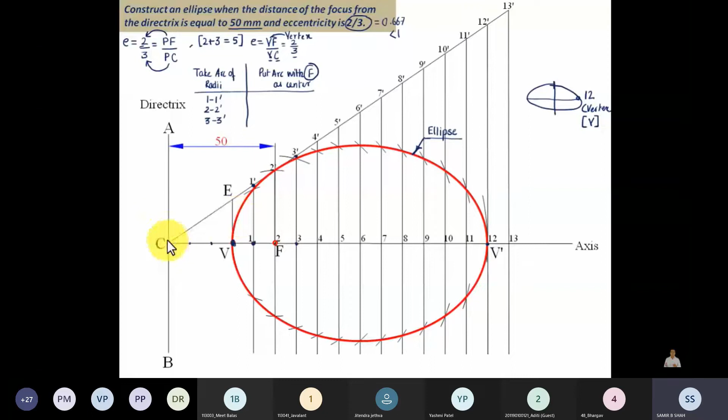So what you can essentially do is keep one leg of your compass at C, other leg at V. Then with V-dash as the center, you need to cut an arc, a vertical line through this. That's the directrix, A-dash B-dash. Over here it was AB, here it's going to be A-dash B-dash.

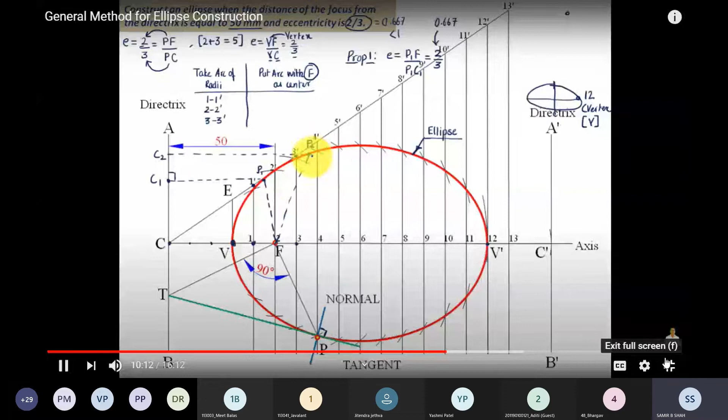Let's say we have another point, P2. When you join P2 with the focus F, and draw a perpendicular line from P2 to the directrix, let's call that point C2, then again if you calculate the distance from P2 to F and from P2 to C2, the ratio of these two distances is again equal to 0.667, that is P2F over P2C2. So that's a very important property of an ellipse.

The point moves somewhere along this plane in such a manner that it maintains its ratio, which is always equal to 2 by 3. That's a very important property. And the second property, let me explain what that is.

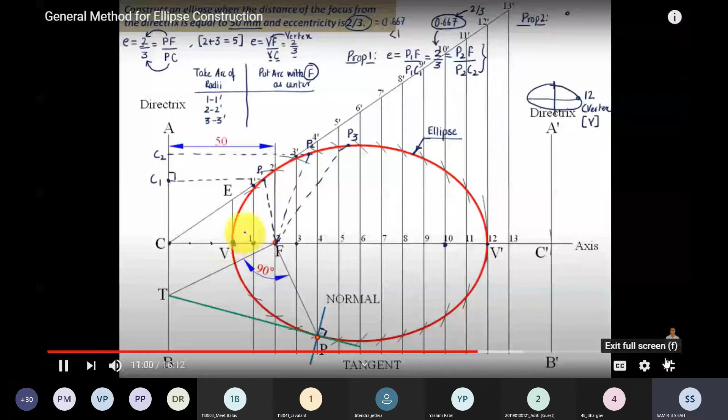This property says if you have a point P3 somewhere along the ellipse, and you join P3 with F, and join P3 with F dash, and sum these two distances, P3F and P3F dash, this value is always going to be equal to this.

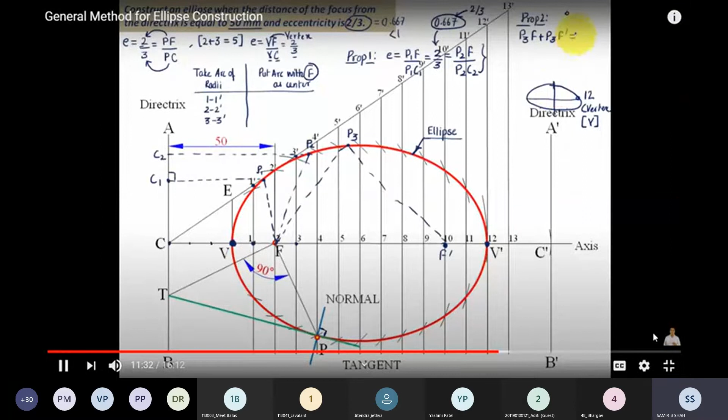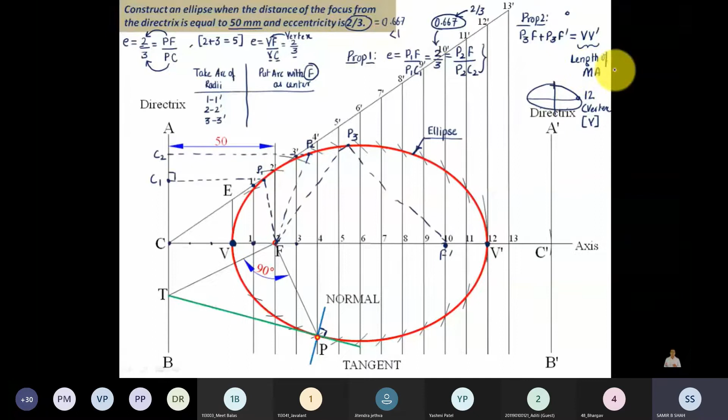The distance from V to V dash, okay, you can also call this the length of the major axis. Now let me prove all of this to you with the help of AutoCAD. Let's head over to AutoCAD.

Okay guys, watch carefully, I'm going to explain this first property. Let's say we have a point over here, somewhere here. Let me join that point with focus F, and let us join this same point with the directrix.

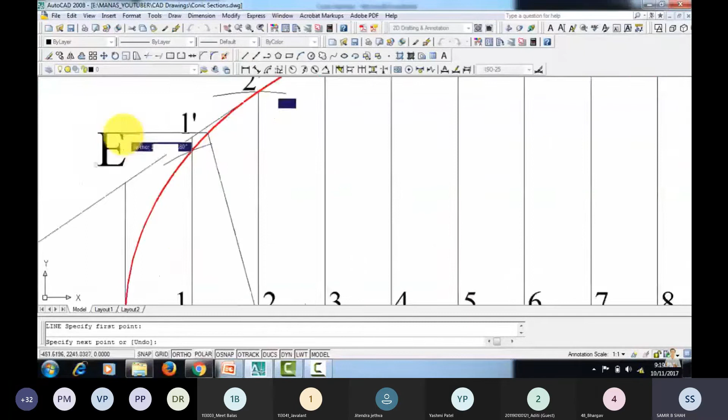So what property 1 says is that this distance upon this distance is obviously going to work out as 2 by 3, or roughly 0.667. Let us check whether this is true or not. Let me calculate this distance.

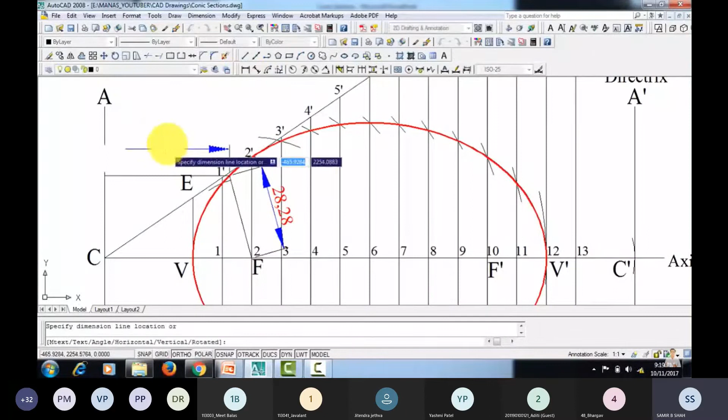This is how much? 28.28. What about this one? This is 42.42. So 28.28 upon 42.42, let me check, where is the calculator? Here it is. 28.28 divided by 42.42, how much is this? 0.667. So if you round it off to 3 decimal places, this works out as 0.667.

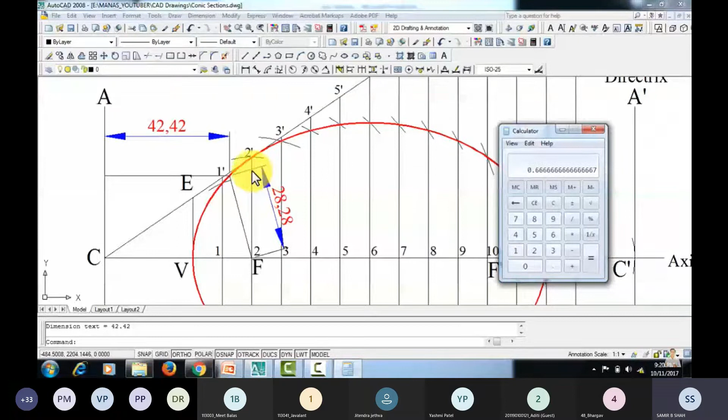So that's true. Let us do this again with some other point. Let me write it, minimize this. Let's say we have a point over here. Let me join it with the focus here, and get rid of this dimension, and this one too. Now let us join this with the directrix.

Again, this distance upon this distance should roughly work out as 0.667. Let me show you why. This over here is 42.99, and this over here is 64.48. So 42.99 divided by 64.48, what is this? 0.667. So the math is absolutely true.

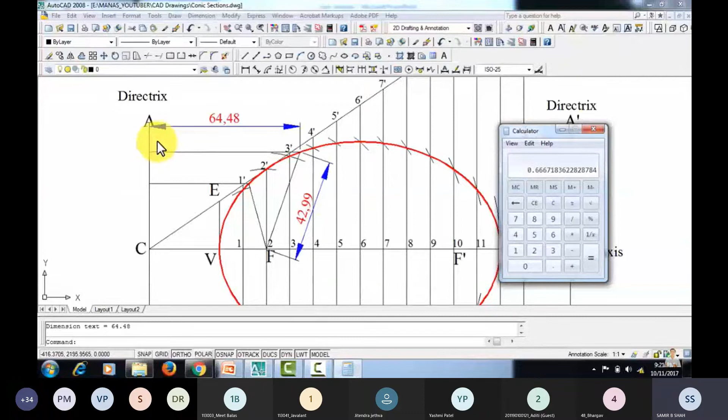Doesn't matter which point you take, this ratio, distance of point from focus divided by the distance of point from the directrix, is always going to work out as 2 by 3, that is 0.667. Now we come to property number 2. Let me delete all of this.

This second property says let's select any point. Let's say this point, and let's join this with focus, and join the same point with focus 2 also. Now it says that this distance plus this distance is equal to this, from V to V dash. Let's check whether this is true or not. This distance is working out as how much?

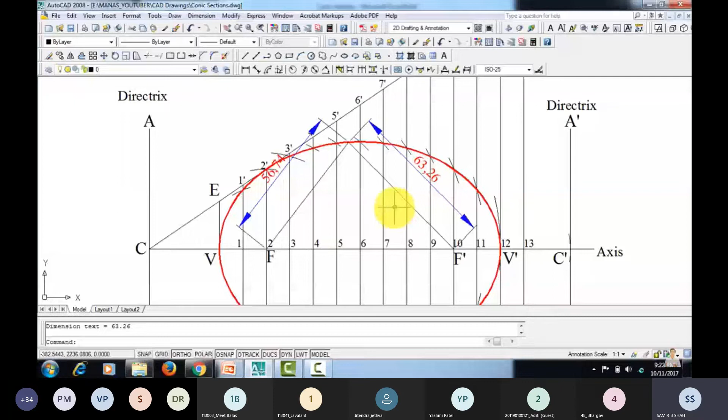56.74, okay what about this one? This is working out as how much? 63.26. Now where is the calculator? The sum of these two distances is how much? 56.74 plus 63.26, how much? 120. Now let us check whether the value of the distance between V and V dash is 120 or not.

Let us check, let me use...

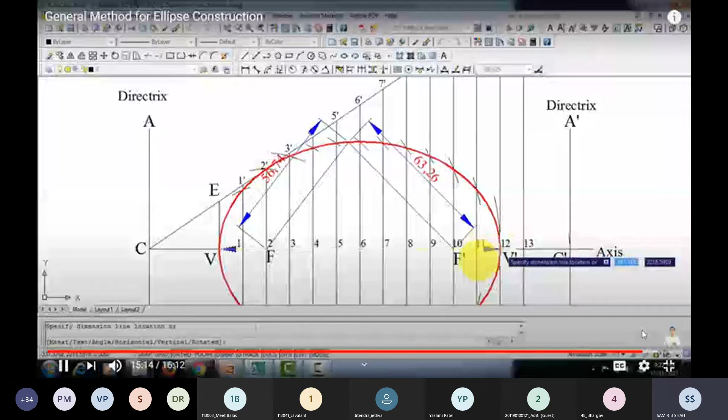Yes, that's true. Okay, so the second property is: you pick up any point, you join it with the first focus, you join it with the second focus. PF1 plus PF2 is always going to be equal to the distance between the vertices, or the length of the major axis, you can say. This in fact is a very important property and I strongly advise you guys to remember. Copy paste this inside your mind, it's going to be very important for you.

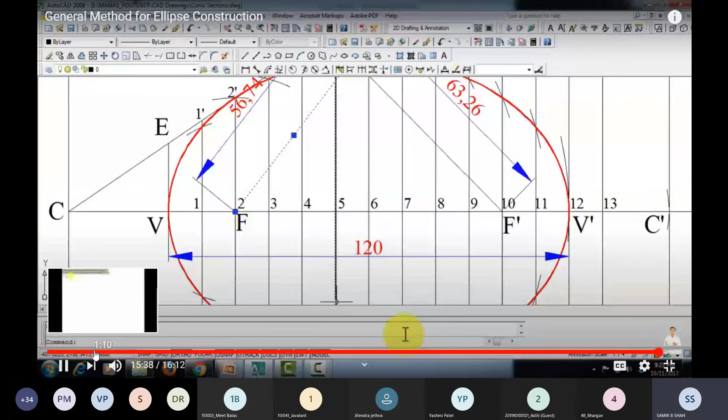As you see on the screen, this is the first method to draw the ellipse. As already discussed by madam in the previous lab, I just repeat it and then I start the new method.

Construction of conics. We start with the construction of conics. This is a subtopic of engineering curves. As we know, engineering curves may be divided in many ways: involutes are there, spirals are there, Archimedean spirals are there, epicycloid is there, hypocycloid is there, and the main point is the cycloid is there, and in the same way these are the conics.

So we start with the conics. After that, we just finish the remaining things also, and each and everything we finish in the lab session. You have to focus that in each and every lab we are finishing one point at a time, and we try to finish all the engineering curves in the lab sessions.

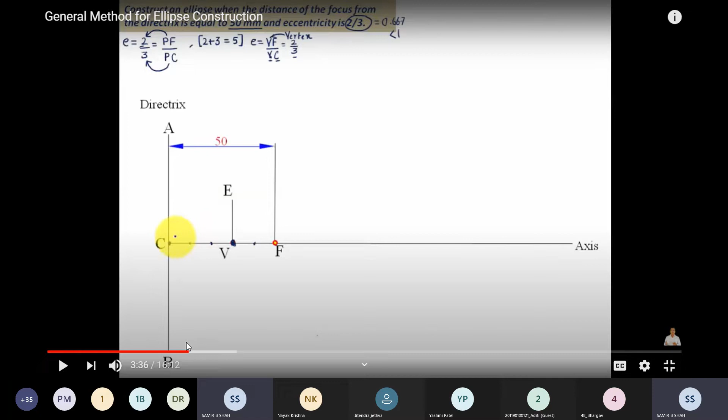So this is the 2 centimeter and this is the 3 centimeter. Based on that I can get the V and I can get the F. This is very easy, as discussed earlier, E is equal to VF by VC. So VF by VC, VF is 2 part and VC is the total 3 part.

So in this way I can divide it. One thing you remember, every time you have to give this point as a vertex and this point as a focus. Now from point V.

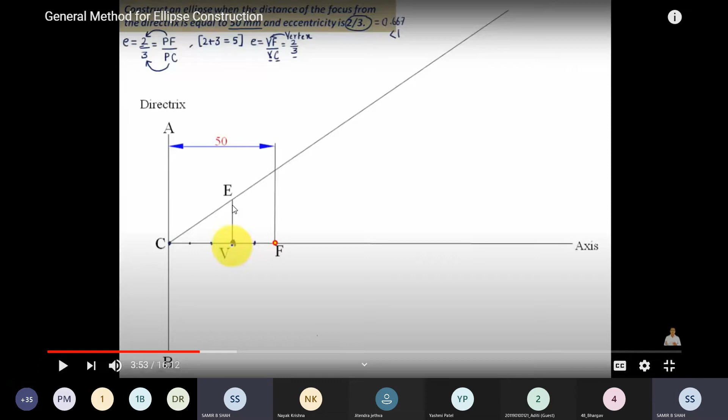Put your rotor at point V and take distance equal to VF, and arc on the vertical line E, so it may intersect on E. Now whatever point E we are getting, from that you just draw one line passing from C and extend it randomly for some portion.

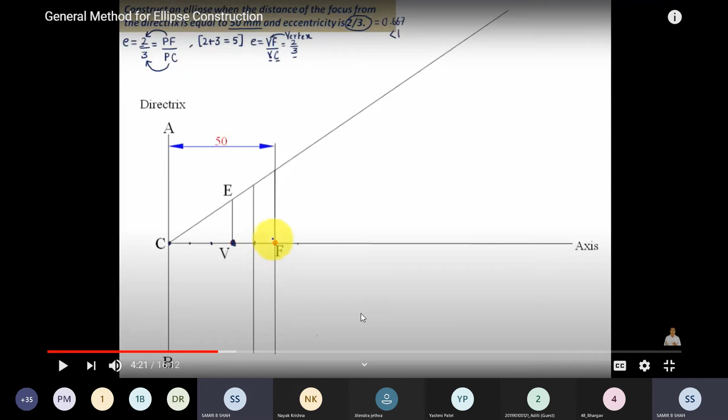Now divide the axis in equal number of parts. As I suggested, here 1 centimeter or 10 mm is there, so you can divide from point V, every part in 10 mm, randomly up to 12 parts.

1, 2, 3, 4, 5, 6. Each and every part should be of 1 centimeter or 10 mm. Extend that part from point V, 1 centimeter, second part, third part, fourth part, up to 12, 13. Why do we go up to 13? Because we have to finish our ellipse, and it requires the curvature right now here.

So at the end we are finishing with the help of curvature, so at that time we require the 13th point. If it's not required, then we are not getting it. So now what we are doing...

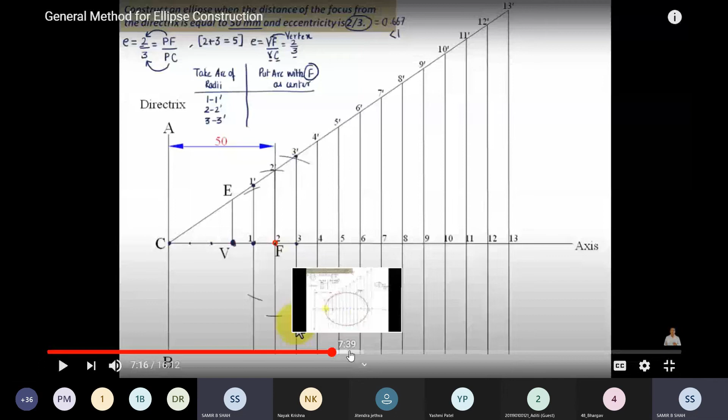Arc 4, 4 dash, center is F. So if I can just mark the arcs, then it may be divided in this way.

Now join all the points with a smooth curve, so it's like an ellipse. You get the ellipse. Do not join with straight lines, you have to join with a smooth curve.

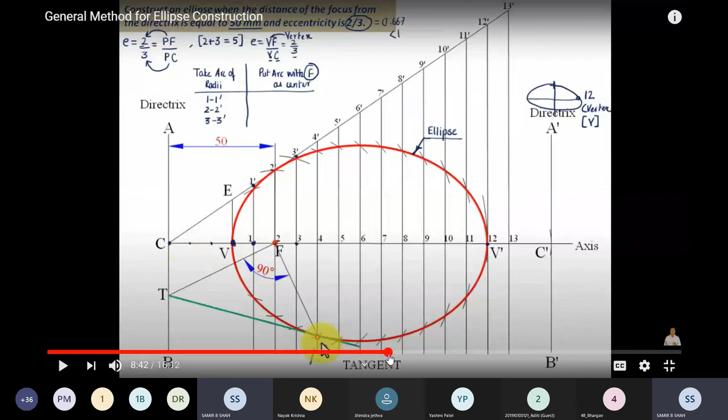Now one thing I want to say, if I want to take tangent and normal here, what do we have to do, as discussed earlier in the video also, let me once again repeat. Take any random point on the ellipse.

After that, join. The point may be considered as P. Here it may be P. Join the point with focus, means F. Draw a right angle, wherever you get the point, join it with F.

Draw the right angle line to the line FP from focus to get the point T. You have to draw the exact 90 degree. Sir, I can't see the drawing. Which may contact on the directrix.

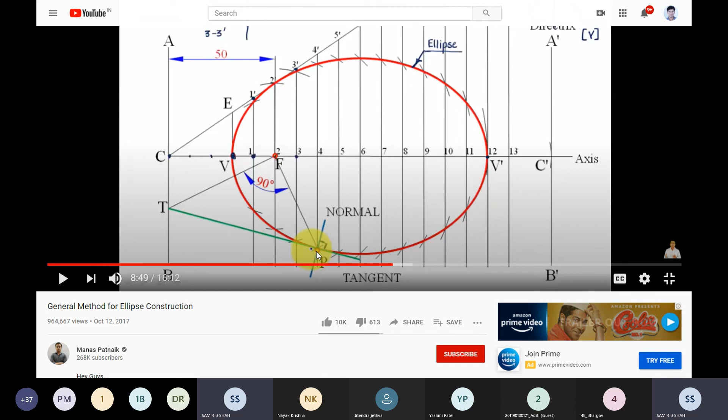Now draw a line or join T to P, which may pass from point P. The line TP is the tangent to the ellipse at the given point, and draw the perpendicular line.

You can see it here. Draw the perpendicular line from point P at 90 degrees, which is the normal. You mention the name also, N N dash. This is T T dash. T T dash, the green line, shows you the tangent, and N N dash, which is perpendicular to the tangent, is considered as the normal of the portion.

So this is the first problem of ellipse, where we used the method named the focus and directrix method.